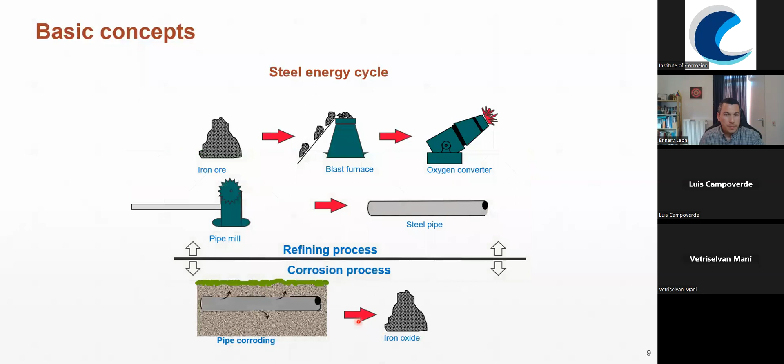Okay, so, oh, 1 second. Okay. Okay. Can you please confirm that you still can see my screen? Yes, we can. Perfect. Yes. Thanks. Okay.

The basics of steel making. Corrosion is nature's reverse, in the sense that, for example, to make a steel pipeline, what we have as a raw material is iron ore. It goes to a blast furnace, then an oxygen converter, then to a pipe mill, and finally we have the steel pipe.

Then when we place the pipeline in the soil or in the water, it will corrode if we don't take the proper measures. It will corrode and it will go back to iron oxide. That is, from the chemical point of view, it's the same as iron ore.

So basically, what we do in this process, especially in the blast furnace, we are injecting a lot of energy to the steel to transform iron ore into steel. So basically, from iron ore, we convert it into liquid iron, and eventually in the oxygen converter, we make steel.

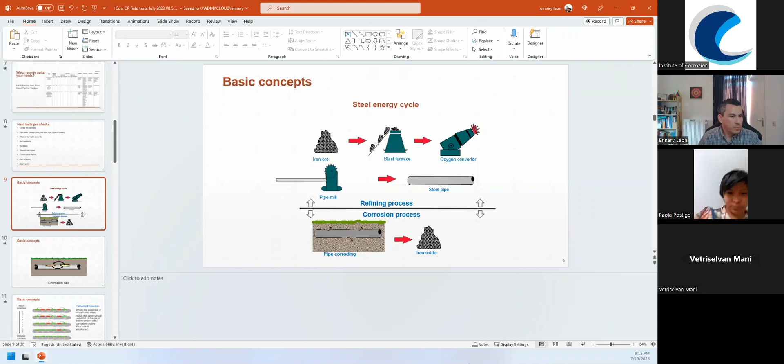And of course, the pipelines are not uniform. In their structure, they have cathodes and anodes, and they have different behavior within one piece of pipe, and that's why in a steel structure we have a corrosion cell.

Once we place it in the ground or in the water, we will complete the corrosion cell, because we will have a conductive electrolyte. That would be the water in the soil, or the water in the seabed, for example. We have a metallic path, that is the pipeline, and we have a cathode and an anode. So the scenario is given for corrosion to take place.

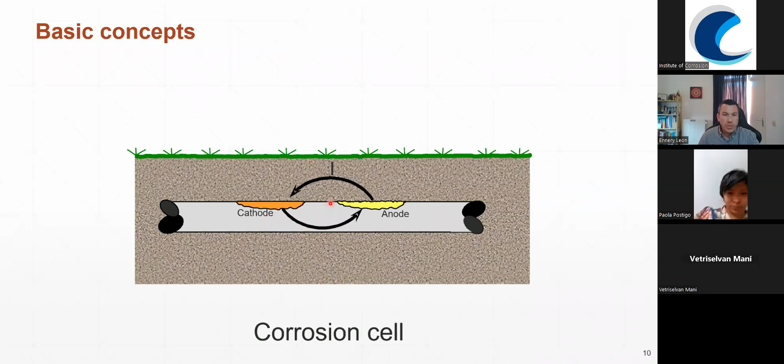So what we want to do with cathodic protection is to avoid those differences in these micro cells that we have within the steel structure. If we avoid the difference between the micro anodic and micro cathodic parts in the steel structure, we are not going to have corrosion, because basically there is not going to be any driving force for the chemical reactions to take place. So that's why we want to polarize the structure.

And usually when we have a piece of steel in the soil, we might have a natural potential of minus 500 millivolts versus copper sulfate electrode, and then we want to polarize it up to minus 700, or later on in the next slide, we will see that minus 850 millivolts is the good target.

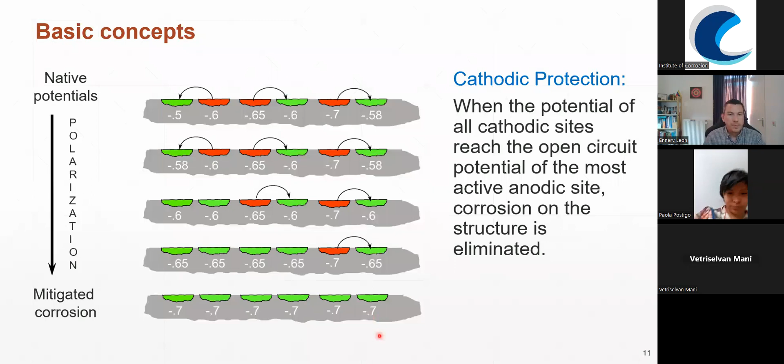So what do we do with cathodic protection? Basically, when we use, for example, aluminum anodes connected to a steel structure, as you can see here, aluminum is more electronegative, more active than steel. So it will tend to provide electrons to the steel, and then the polarization of the steel will take place.

Then the second survey that we can use is the close interval potential survey, or CIPS. This one is a continuous potential measurement method. We used to have a measurement every 1 or 3 meters. Usually we choose a gap between the readings according to the depth of the pipeline. We need to use wires and data loggers, of course, to record the readings. It's used to check the CP protection level along the pipeline. We need to synchronize the TRs.

And as I said, we usually set the interrupter at a rate of 4:1, meaning the off period should be less than 3 seconds to avoid depolarization. So, as I mentioned in a previous slide, if we have chosen 0.5 seconds off, then we will need to keep the TR on at least 2 seconds.

With this survey, what we do is connect. If we have ICCP, we could use the rectifier. If not, if we have galvanic anodes, then we need to use an external power supply, a battery for example, and we need to use also an interrupter, because we need to know how much current we are injecting, and we need to make sure that we are switching in a controlled way, using the cycle that we need. So we connect to the test station. We set up the interrupter and the rectifier.

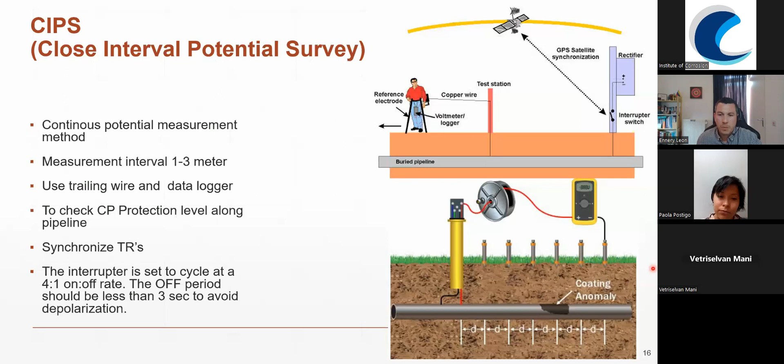So DCVG is a direct current voltage gradient. This one helps us to have an accurate detection of the defects in the pipe coating. The target of the DCVG is not to say anything about cathodic protection, but cathodic protection and coating is a perfect marriage. So we need to make sure that both are okay. If we want to have a CP system working properly, our coating system should be also working properly, should be in good shape. So that's why DCVG is so important to assess CP.

It allows us to have an evaluation of the size of the defect, the length of the defect. That's also important, because if we're doing the CIPS, as I said, we will know that in one area we have a problem, but it could be a problem that is 1 meter long, 5 centimeters long, 12 meters long. And the CIPS doesn't give information about how long the defect is, but the DCVG does.

And we can also have an evaluation of the current state of the corrosion in the steel that is exposed, and we will discuss that in more detail in a few minutes. It can give us information about, okay, we have a defect, but is the CP capable of protecting the exposed steel in this scenario? We will hear more about it in a second. We can also confirm the location of galvanic anodes, and we can investigate areas of possible electrical interference.

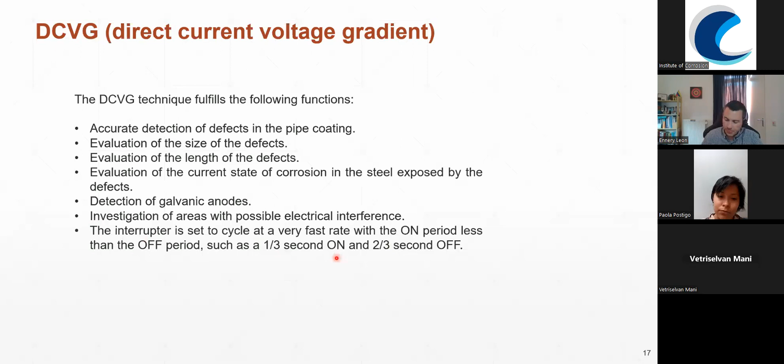Okay, a brief explanation about what's the DCVG. First, we use a voltmeter that can flick to the right or to the left, and we can have an indication of how many millivolts we have. They are quite accurate. We can have a reading up to 1 millivolt, and we will see in a minute why that's important. One of the specific characteristics of this type of equipment is that it will flick to the right when it's a positive reading, and to the left when it's a negative reading. Usually multimeters or voltmeters only go in one direction. But for this survey, it is important to know where the current is going to.

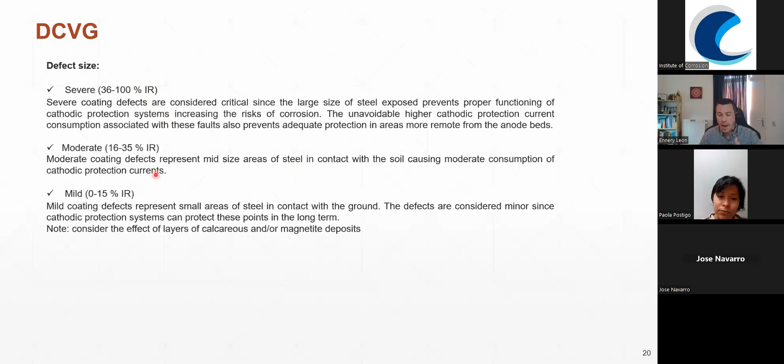Okay, I also mentioned that with DCVG, we can have an idea of the defect type. So we can say if we have a cathodic anodic defect, and this is when the rectifier is on, the cathodic protection is efficient, so it is protected. But when the rectifier is off, the cathodic protection is totally deficient, so the pipeline doesn't polarize, it's going to corrode. Then we have a cathodic scenario that if the CP is on, that defect is protected. And also, if we switch off the CP system for a few hours or days, the coating keeps the polarization in the pipeline, and that specific defect is going to be protected for a couple of hours or days.

And the worst case scenario is when we have a defect that is anodic. So even if the CP is on or off, it's going to be corroding. Usually, despite the size of the defect, all those classified as anodic should be repaired, even if they are small. And this is one example of how you can record your findings.

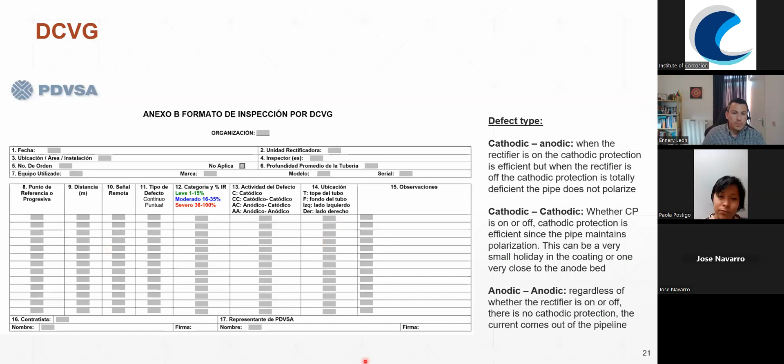Okay, with the PCM or pipeline current mapper, we don't need to have a contact to the soil. We place the equipment just to have a stable reading, but basically the equipment doesn't have to be touching the ground because it's an electromagnetic field principle, so that's quite advantageous. With this one, we can characterize the current flow in a pipeline. It can be used at road crossings, and to identify the contact between pipes.

We can do 3D pipeline tracing in the sense that this one allows us to get information about how deep the pipeline is. This is quite useful in pipeline corridors where we might have 2 or 3 pipelines crossing each other, and maybe we have a 2D plot and we don't know which one is on top of the other. With the PCM, we can have information about how deep each one of the pipelines is. We can measure the current attenuation along the pipeline, and we can indicate pipe anomalies like coating defects or metal contact with other structures, etc. Okay.

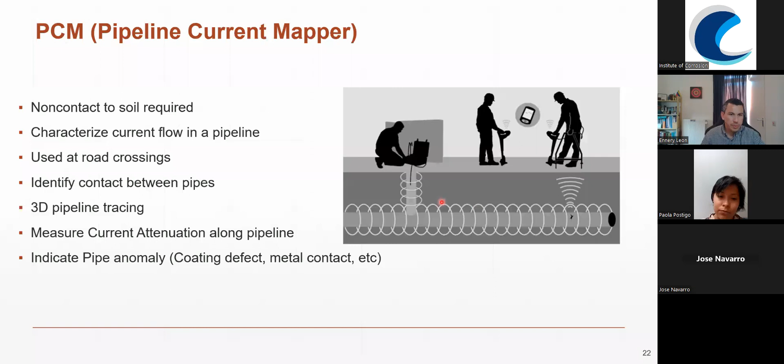Okay, so on the left hand side picture, we see a normal current distribution. We have here a transmitter that is part of the equipment. Let me explain a little bit about the principle of this survey. We have a transmitter that is connected to the pipeline, maybe through a test station or a temporary connection to ground. But we need to have a physical contact with the pipeline. So this is the transmitter, and we have a receiver that is going to give us information about how deep the pipeline is and what's the current received in a specific part when we are on top of the pipeline.

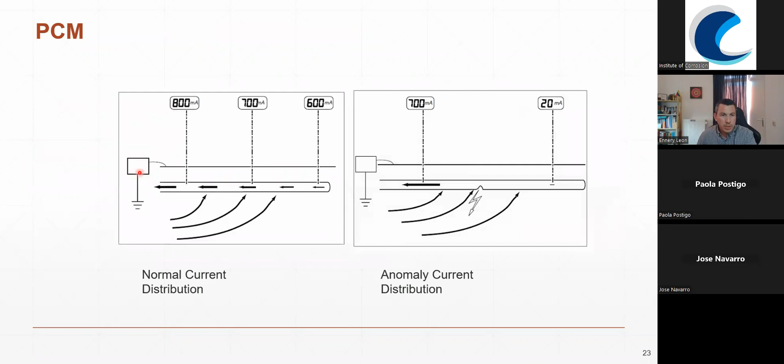Okay, so our pipeline is connected to the transmitter, and then with the receiver, we're walking through the line and doing the readings. So this is a normal step-by-step procedure, and depending on the distance that you have between readings, you will have a higher or lower current readings. The important thing to take into consideration is that it should be uniform. Let's say if we have, in this example, 100 milliamperes difference, I would expect that the distance between each one of these locations would be quite similar.

Because if it's not the case, and we have a large change in the current distribution, we might have an anomaly or a contact with another metallic structure. And then we need to identify this defect. And to do that, we will discuss it with the ACVG application that we have with the PCM equipment.

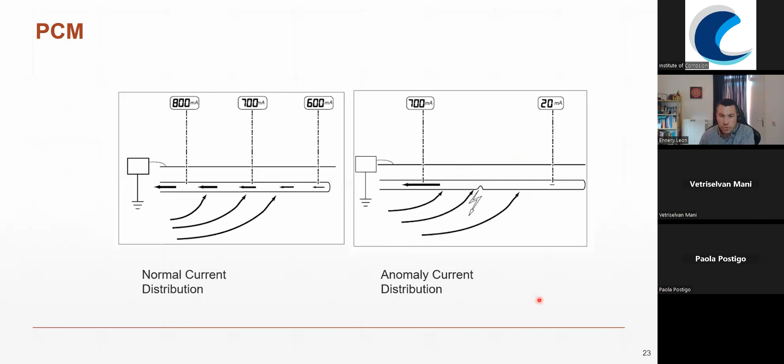I also want to mention one thing, that the PCM can be quite useful when we are in the middle of a road crossing, because it can help us to avoid the necessity, for example, of drilling holes in the asphalt. This could be a preliminary test. We can check upstream and downstream the road crossing, or if we have a canal or a river, we could check on both sides.

And if we have a uniform current distribution, we don't need to assess in detail, for example, doing a CIPS in between those locations. We can skip that. We can say, okay, coating is okay. We are not losing current. We can move on. That could also save some time.